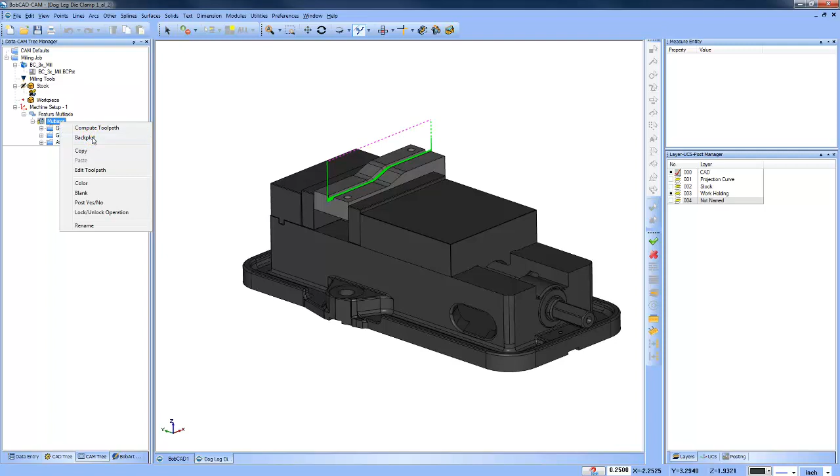Right, let's take a look at today's project. We're talking about 3-axis machining using projection curves. The desired result here is to machine this radius slot that we see here.

Okay, so if we zoom in here, you can see that we're using a ball mill, and we need to come in and machine this slot. We want to rough it out, so let's take a look at the steps to set this job up, the toolpaths that you use, and the options within that toolpath to get this done.

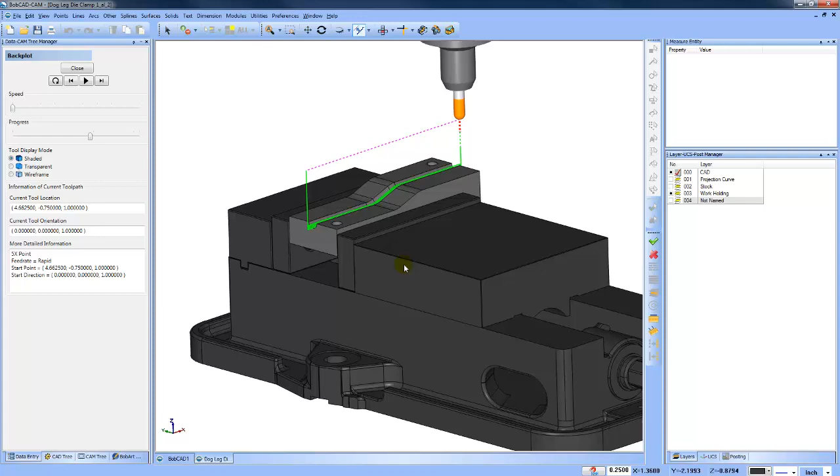All right, so this part comes in as a SolidWorks SLD PRT file. This is the way that it comes in to begin with. I'm going to go to a top view. My normal workflow is to align the part with the top view, just like the spindle would be looking down on the machine. So when we go to a top view, I'm looking down on the part. When I go to a front view, I can see the front view.

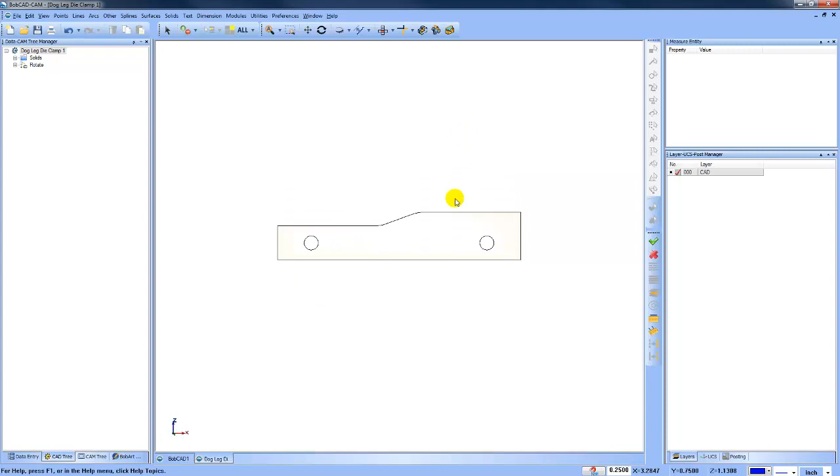Okay, all right. So what do we need as far as geometry? We're in the geometry prep stage. So what do we need as geometry? Well, we're going to use the Mill Premium projection toolpath. That's the one we're going to use. So we need geometry to project.

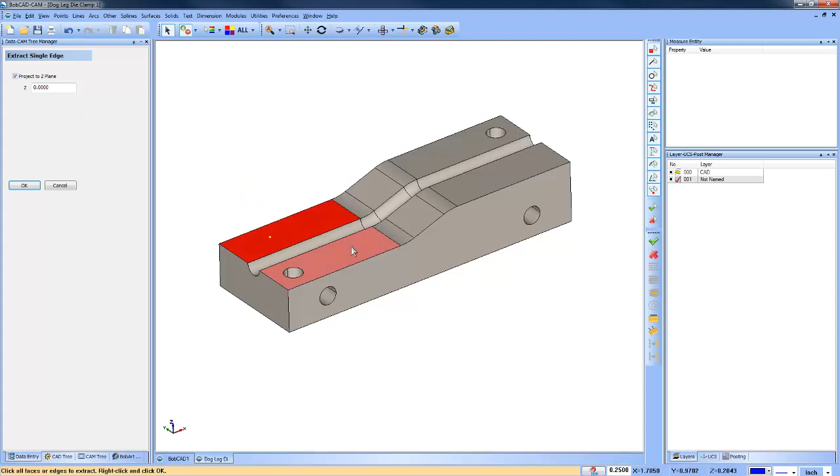All right. So the first thing I'm going to do is create a new layer and make it active. Then I'm going to come in here under Utilities, Extract Edges Single, and I'm going to use this to get some of the wireframe. Now I'm going to project to Z 0, so I'm going to flatten the geometry, and I'm just going to pick two of these faces here and hit my space bar and then cancel. All right, so what that's done is it's just created the wireframe for these two edges.

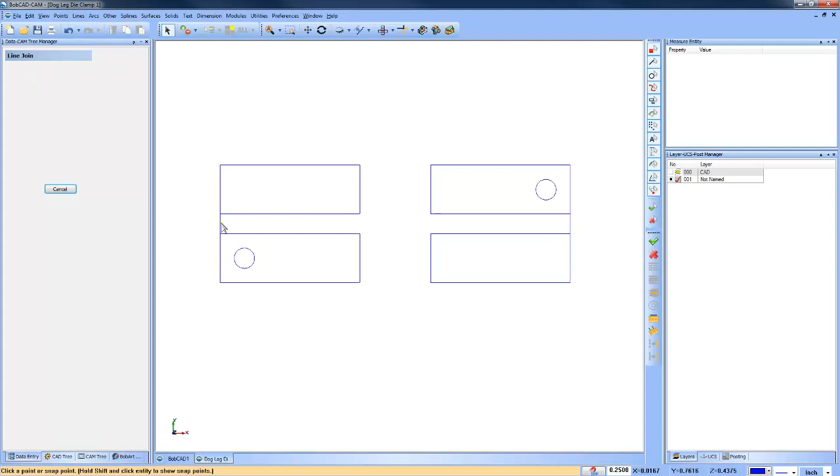I'm going to join a line between here and here and here and here, and then I'm going to do line join, and I'll go from the center of this one to the center of that one. Okay, so essentially what's happened here is all this geometry was just used to create this center line path. Okay, so that's the center of our groove. There's other methods in order to get there, but this is the method that I use.

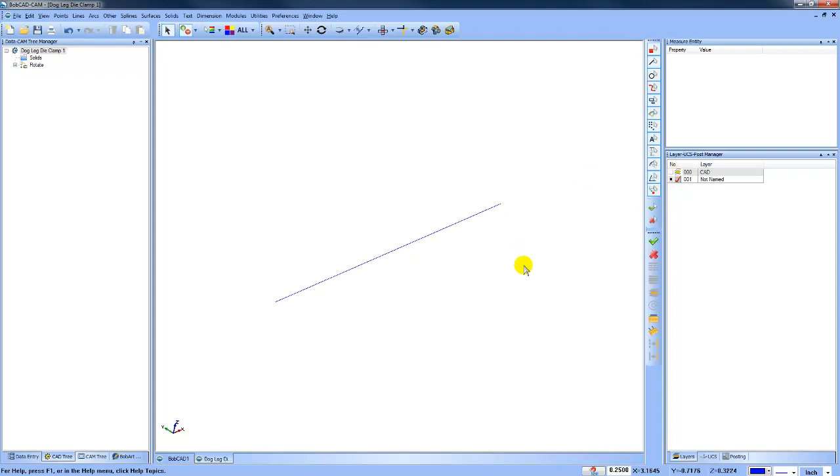Now, the next thing I'm going to do is I'm going to translate this up. This geometry, I want to translate it up so it's above the part. So we'll do Utilities Translate. We'll select on our geometry here, and I'm just going to pull this up in Z, and then I'll say OK. All right, so I have my model, and I have my line that represents my projection curves, and that's a good start.

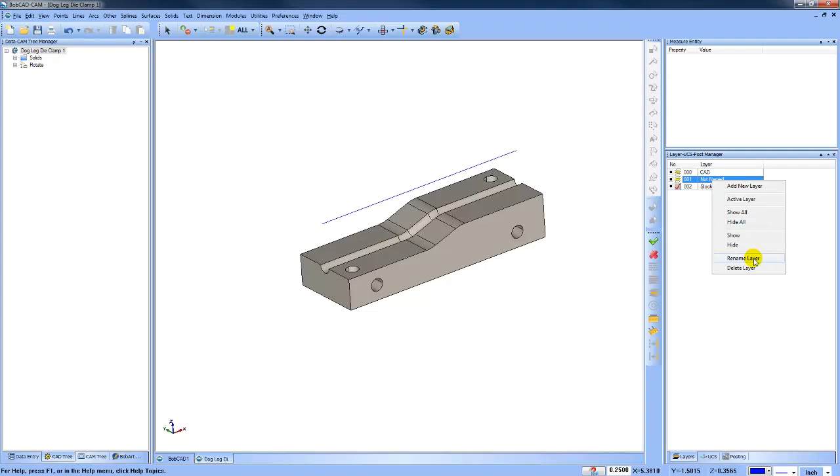Now, I also, because I want to simulate it and see what's going on, I'm going to create some stock. So I'll create another layer called stock here. I'm going to make this active. This one here I'll rename, and I'll say projection curves. And we'll blank that one out.

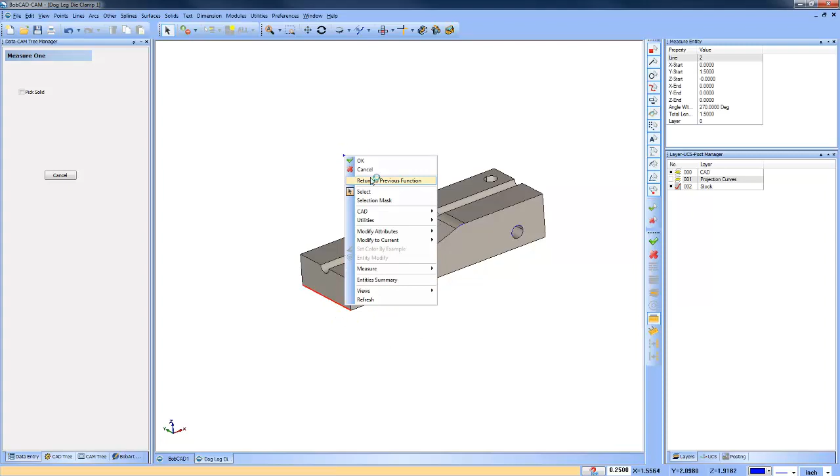All right, for the stock profile, we're going to go to Utilities, Extract Edges Single. We'll click on this face here. Actually, I need to uncheck Project to Z Plane. We'll click on this face here, space bar, right click, cancel. All right, I do need to figure out what the length of this is because I'm going to extrude this to represent the stock. So I'm going to just click measure and click on this edge, and it will tell me, it's 1.5 inches.

All right, so from here, I'm just going to get rid of these. I don't really need to get rid of those holes, but I'm just going to get rid of them. And then I'm going to do surface, extrude curve. I'll select my geometry here, and then this is going to go 1.5 inches this direction, and we'll say OK. All right, so this is going to represent my stock.

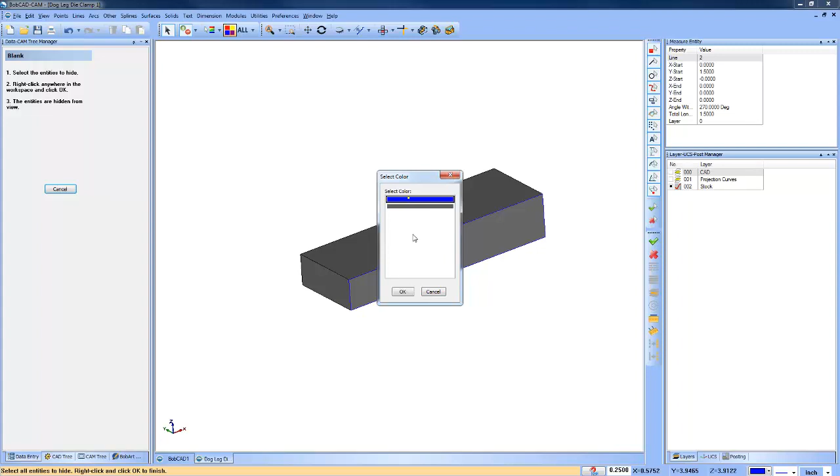Now, at the same time, I'm just going to blank out my blue geometry here. So I'm just going to get rid of that just so I have my solid for the stock. So I have my solid for the stock. I have my part model, and I have my projection curves. At this point, my CAD steps are pretty much done.

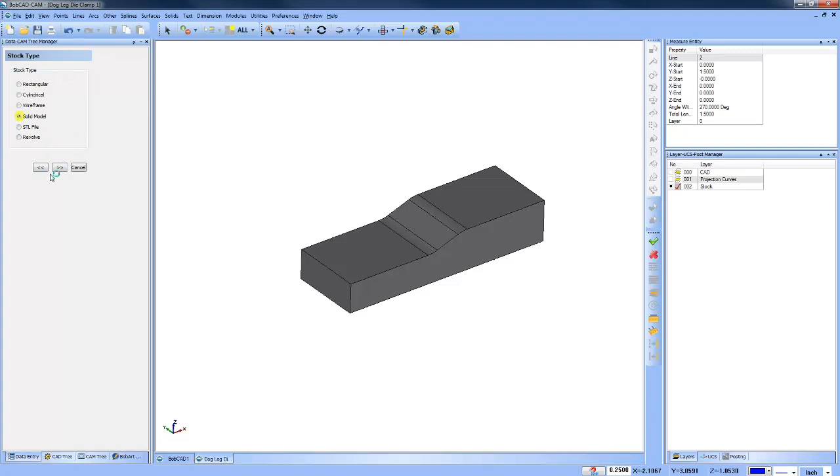The first thing I'm going to do is run this through the stock wizard. I'm going to use a solid model stock. I will pick the model we just created as our stock. And then for our 0 position, I'm going to pick this top corner here. Now, a quick tip here, this bounding box that's created definitely can be useful.

So if you want to keep it on the screen, just click measure and click on one of those lines, and it will actually put that on the stock layer now. So you have all these points and that bounding box, which can be pretty useful.

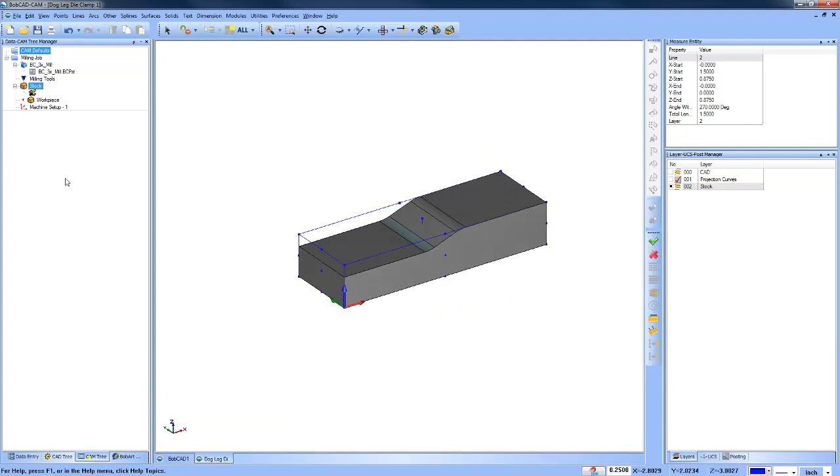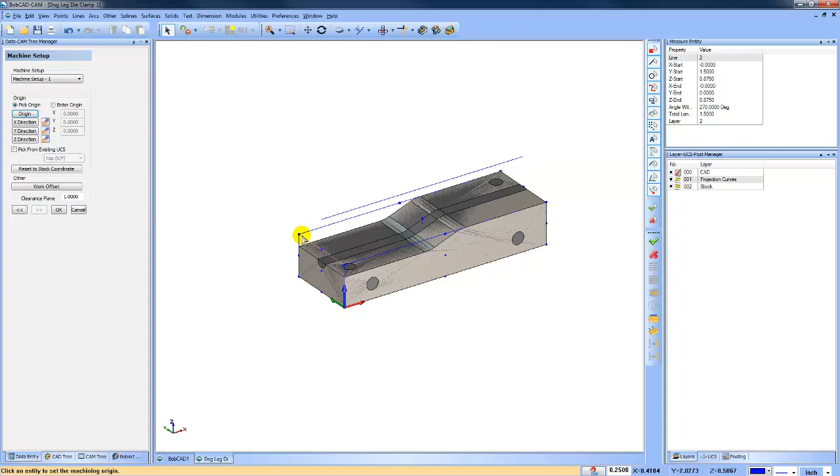I'm going to come in and choose edit here. Sometimes when you edit your machine setup, you may need to turn the visibility of a primary layer up, so I just turned them all on. I get my bounding box, I'm going to click origin, pick this top corner here, and say okay.

Alright, so I got my zero set up, I have my stock set up, I have my projection curves, I'm ready to go. I'm going to blank out the stock, so we'll just choose blank.

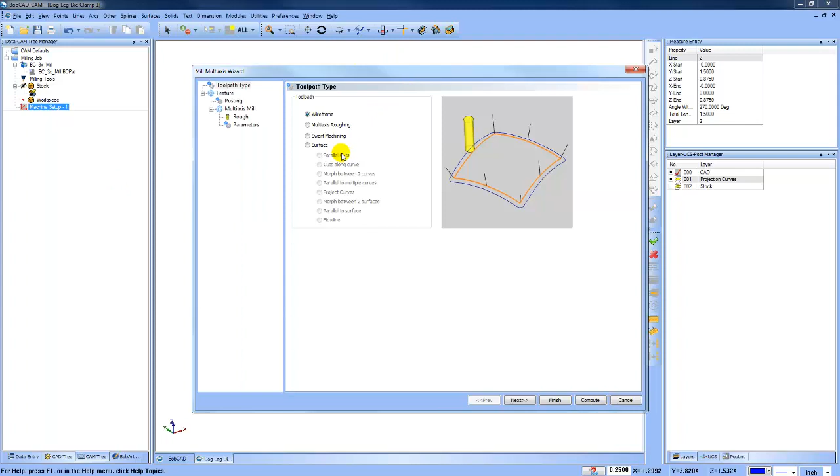I'm going to right click on my machine setup, go down to Mill Multi-Axis. This is the Mill Premium toolpath we're going to use, and the one we're using today is called Project Curves. So this is the one we're going to use.

We're going to choose next and go to our tool. I believe it's a quarter inch, so we'll set up a quarter inch ball mill here. We're going to go next.

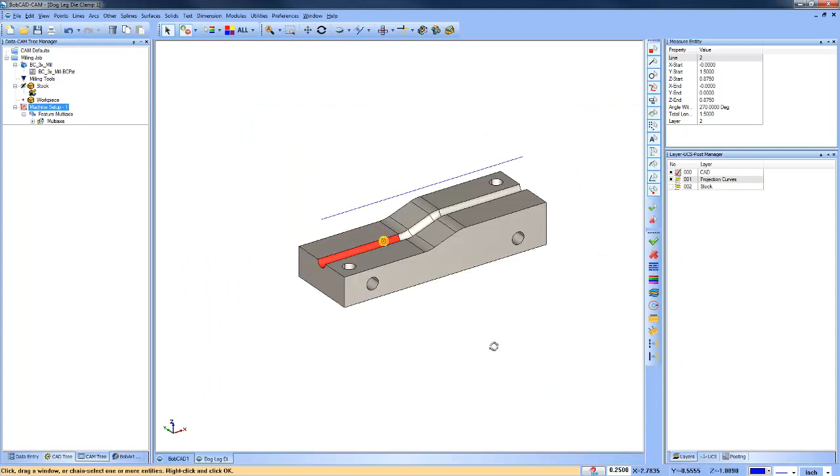Alright, there's a bunch of things going on, but we want to go to edit curves and pick our projection, which is this line here. Our drive surface, we're going to click drive surface, and there's a couple. The drive surface is all the surfaces we want the toolpath driven along - in this case, this radius groove we have here, this 3D radius profile.

We'll select all those with spacebar. Alright, there's the max projection distance - this is how close your projection geometry is to the drive surface, so I'm just going to make this one. This is going to be on center. All of that is fine.

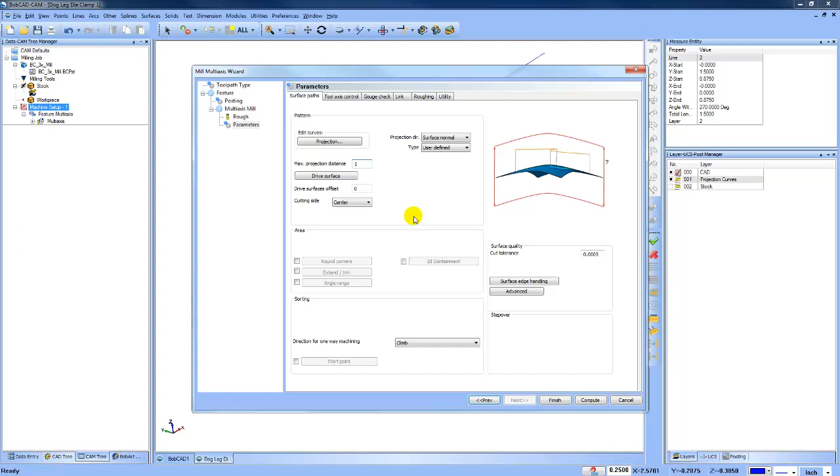There's nothing else I really need to do in this dialog. When I go to tool axis control, because I have a full license with all the options turned on, I have access to 5-axis, but in this case this will be limited to 3-axis. That should be good here.

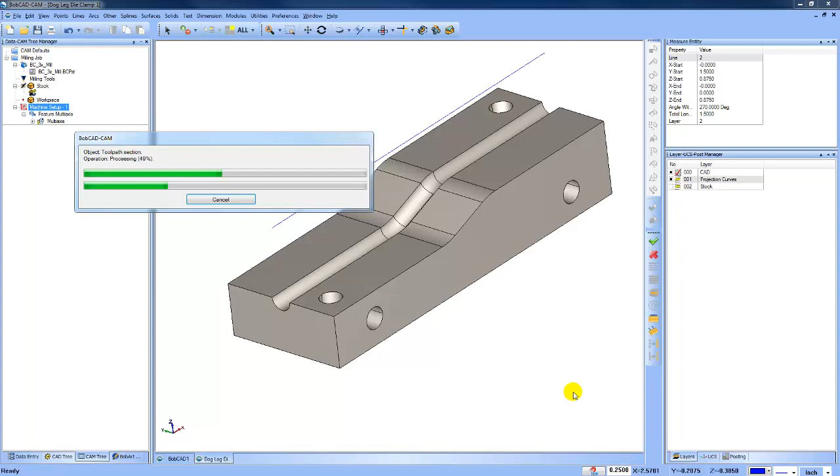Now what I'm going to do is compute the toolpath - it'll take a second to calculate. Once it's done, I'm going to see the toolpath on the screen. If I hit T for transparent, it makes it a little easier to see.

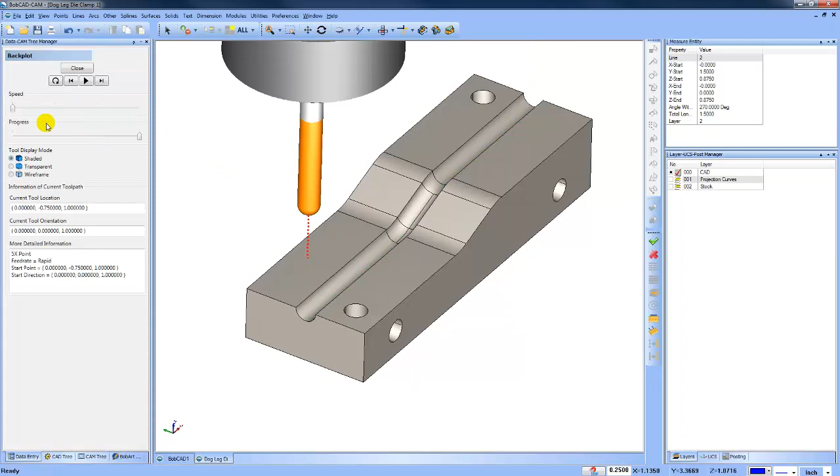If I hit S for shading, you can see we get our centerline path just like we wanted. We can turn our projection geometry off. We can come over here and backplot this if we want to take a look at what is happening.

Okay, so when we backplot this - let's get in here and backplot again - we're kind of looking at where the tool starts and what direction it goes in. The other thing is we probably don't want to take this in a single pass; we probably want to take multiple passes.

So do you want it to cut downhill? Do you want it to cut uphill? The first thing I'm going to address is the direction of cut. So when I come in here and do this backplot, you can see it's starting on the left and going to the right.

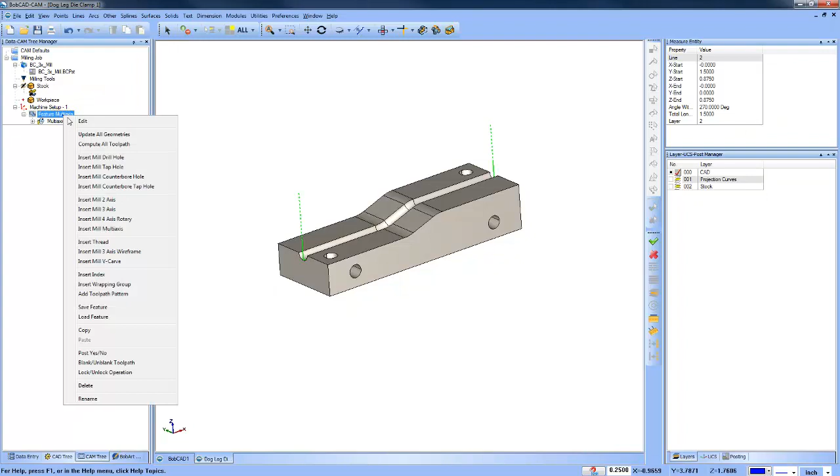What if I want to change the direction? What if instead of it going up, I wanted it to go down? Okay, if we edit our feature here, we go to parameters, and go to this start point option, so we can click start point. We're going to set point by position.

We'll click these three little dots here - we're in a selection mode now. We can pick a point or pick a line; we're going to choose pick. We're going to turn the projection geometry on, and I'm going to use shift left click to get my snap points, grabbing this one on this end. Alright, it will return the value.

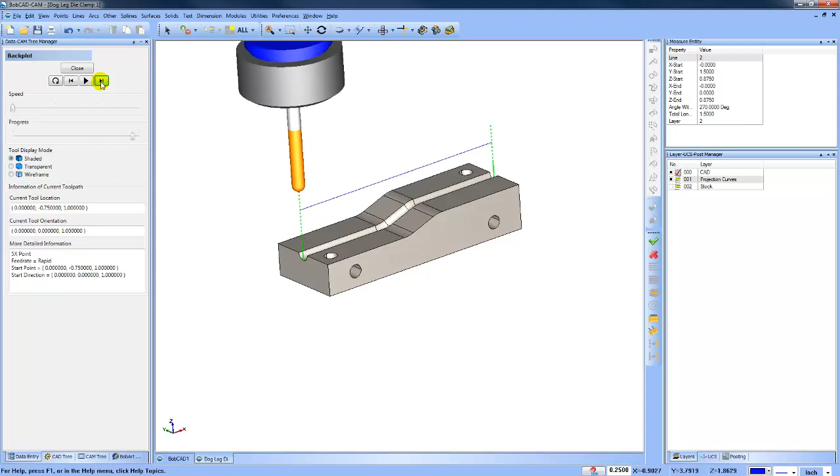We'll say okay. What I'm doing right now is just recomputing, and what we should see is that the toolpath now changed what side it started on. Okay, so at first it started on the left, now we have it starting on the right. So if you want to change where your start point is with these premium toolpaths, you can go to your start point here.

You can do pick a position. We're going to choose pick. Shift left click on an edge or a curve you want to work with, pick the point location, choose OK, recompute, and now we've changed the direction.

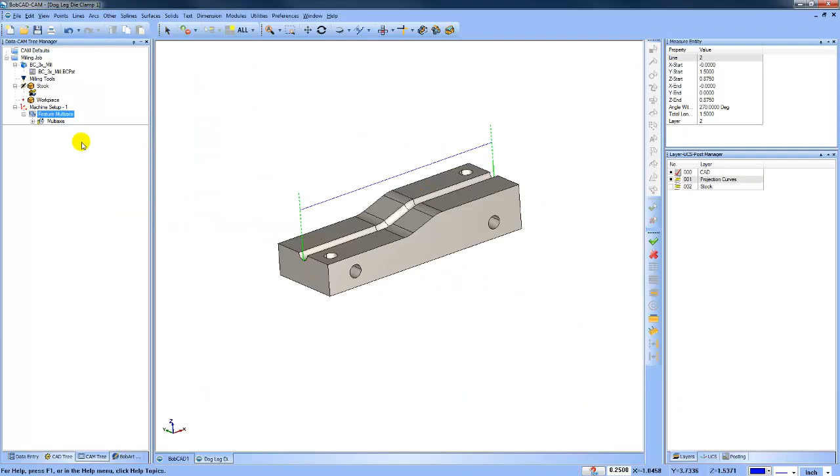I think it makes more sense for this to go uphill, but I'm sure there are some opinions about it. So that is changing the direction. Now, the other thing is we don't really want the tool to just plunge right into the part.

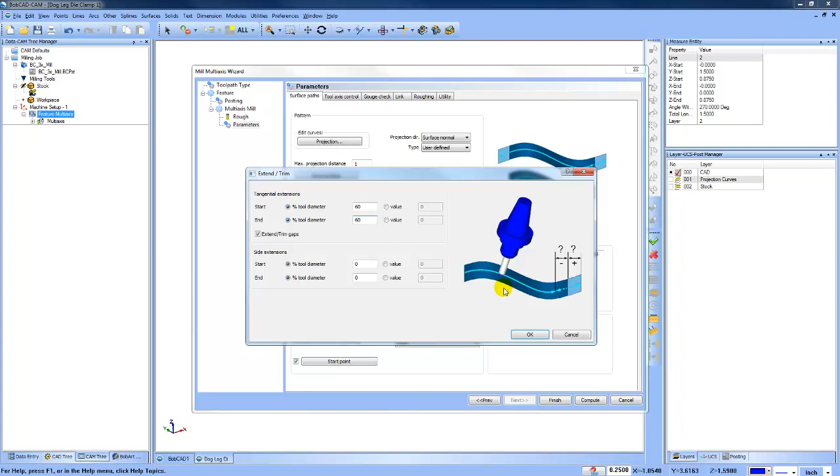We could use a lead-in option, but what I'm going to use is an extension. I'm going to edit this, go to parameters, go to extend and trim. I'll click this option here and say I want an extension of 60% of the tool diameter. What this will do is extend the toolpath to start off the material, and then it will work its way in.

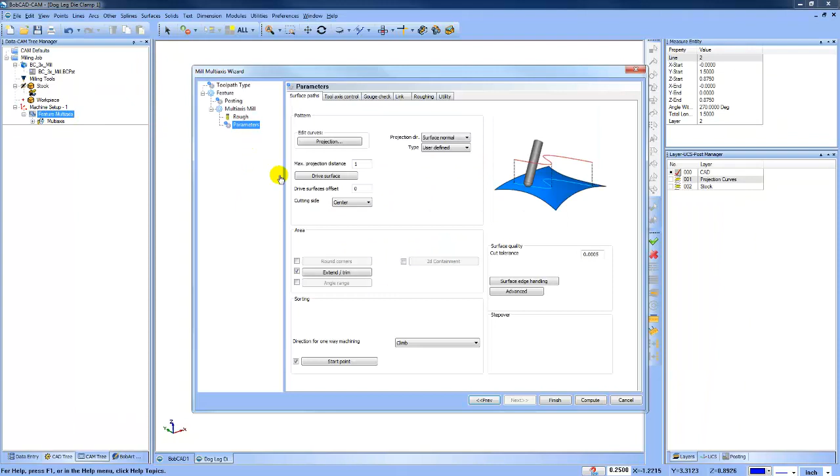All right, so we're still kind of at a finish pass here. We need to rough this out. We need to take multiple steps to get down to the bottom. So if we come back and edit, and go to parameters, this is where we'll go to the roughing tab.

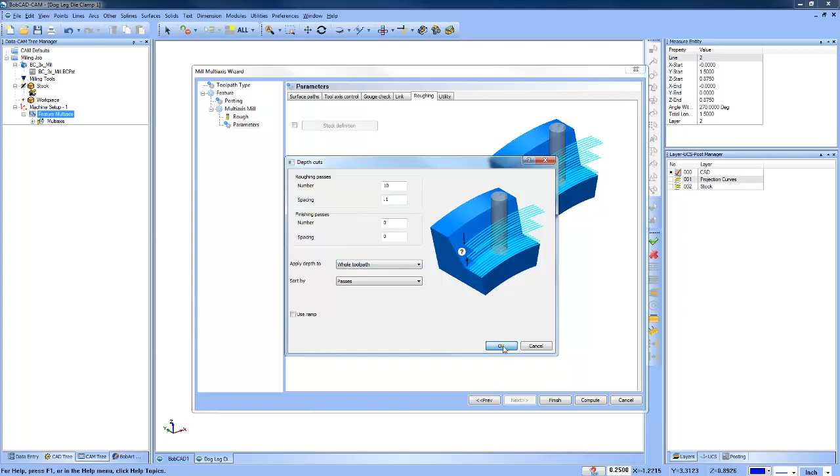Under roughing here we have depth cuts. We can turn this on with the checkbox, click this dialog, and say the number of passes. I'm going to say 10, and then we can say the spacing. I'm going to say 0.1. We'll choose OK and then hit compute. What we'll see is we get 10 passes at a 100 thou increment.

If we backplot this, we're going to see it starts from the left and goes to the right, and once it gets done, it rapids back and repeats the process. Now, you can see we have a bunch of air cutting here. Obviously we don't want 10 passes at 100 thou. So what are some of the ways that we can eliminate the air cutting?

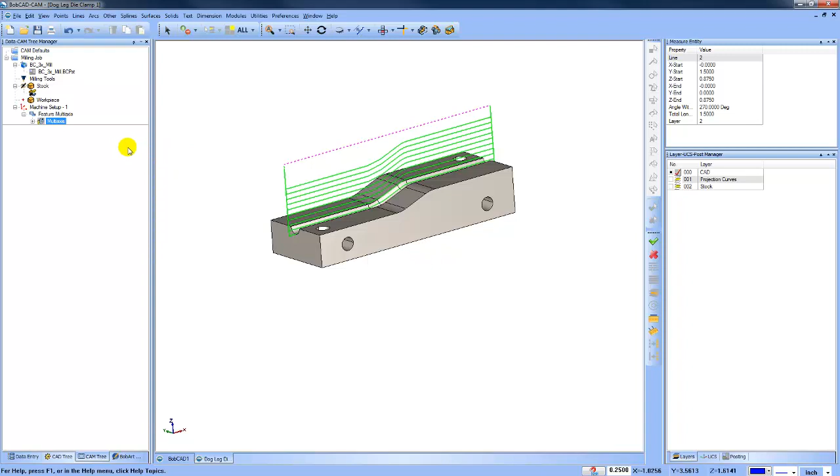Well, one of the ways you can eliminate the air cutting is if you turn roughing on and just check on stock definition. There are some parameters here you can use to adjust, but in general, just turning the stock definition on and hitting compute, it will look at where there is material, and then trim out the toolpath that isn't in the material. So that's one way to trim out unwanted moves.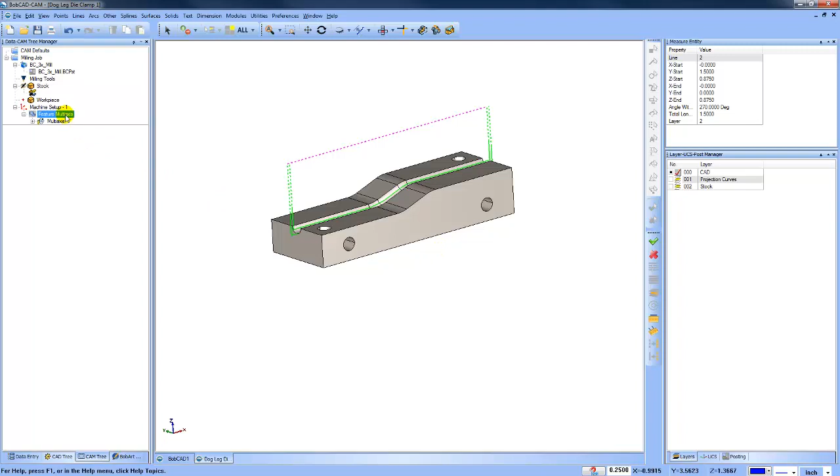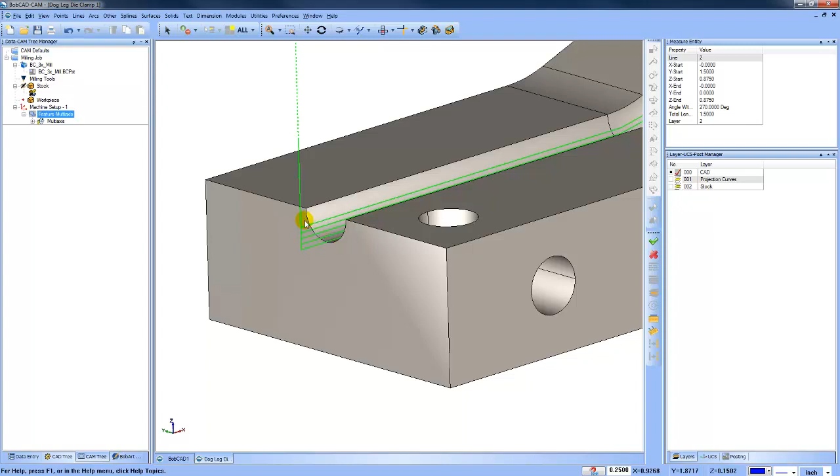Another way that may make more sense, it just depends. It may make more sense to just look at how many passes you want to have. So I'm going to go to like 0.025 and say 5. I'll say OK and compute. Now you can see I'm doing some light passes and I'm in the material the way that I want. So you can either use the numbers or trim to stock, whatever makes most sense to you.

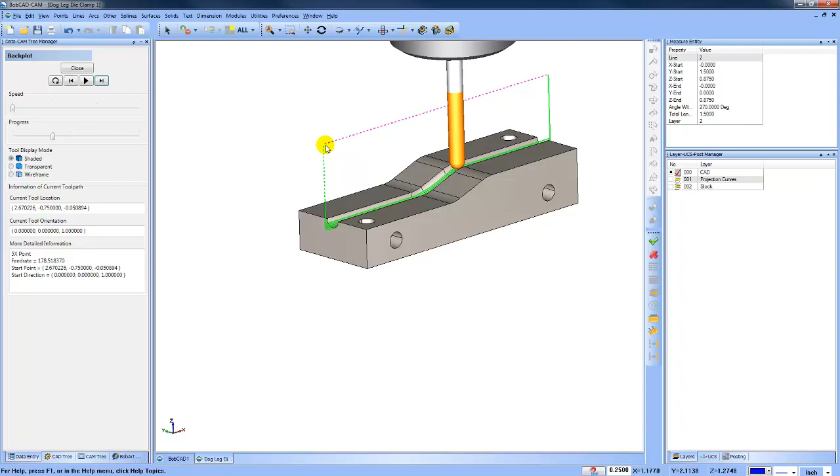Now, here's the thing. Right now this is going in a single direction. So it cuts, and once it gets done, it rapids back and cuts again. Depending on whether you're doing a rough and a finish, and the material you're working with, you may want it to go back and forth instead of going up to clearance every time. So how do you accommodate for that?

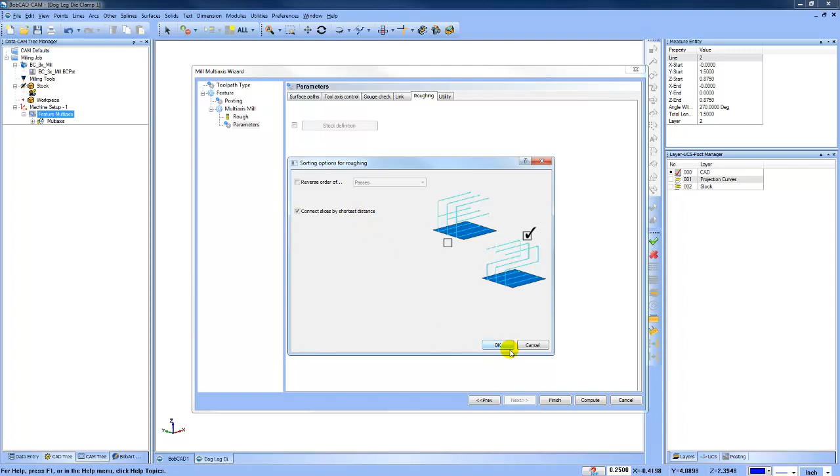You're going to edit the feature, go to parameters, back to roughing, and there's this sorting option here. We'll turn sorting on, check this box, and do connect slices by shortest distance. This is the one we want, and this will give us a zigzag pattern. So we'll go compute, and you'll see how the tool now drops down from left to right and works its way, so we get a more efficient path versus going to clearance every time. So that in a nutshell is one way you can use the Mill Premium toolpaths to machine a radius slot that's on a 3D curve.